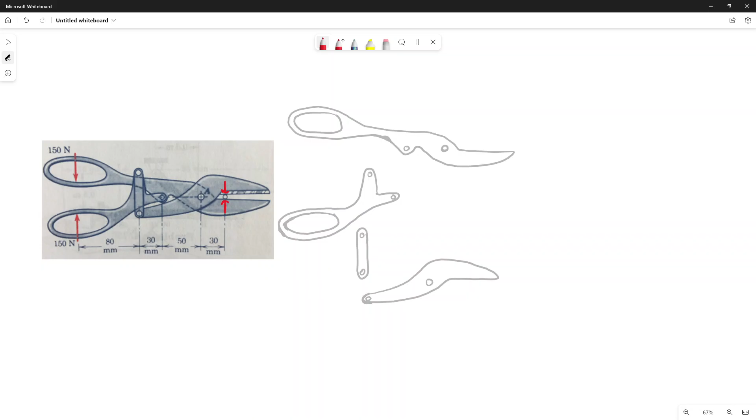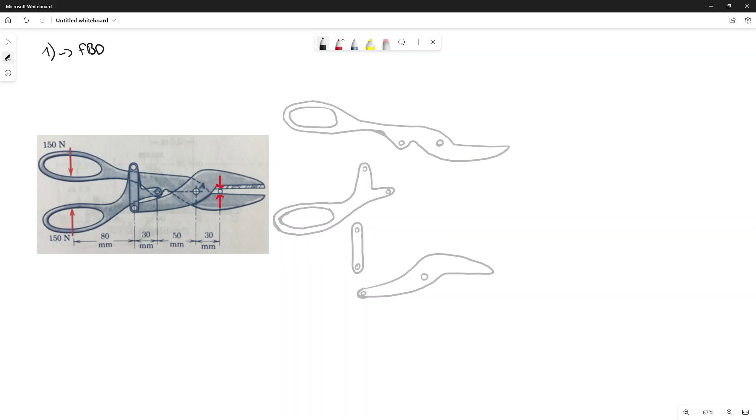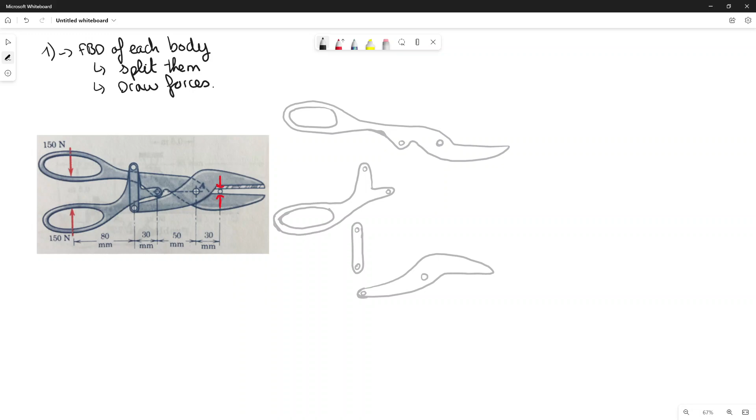Step number one, and I already did it to save some time on the video: free body diagram of each body. What you need to do is split them, and after we split them, we will now draw together the force on each element. So let's look at what we have.

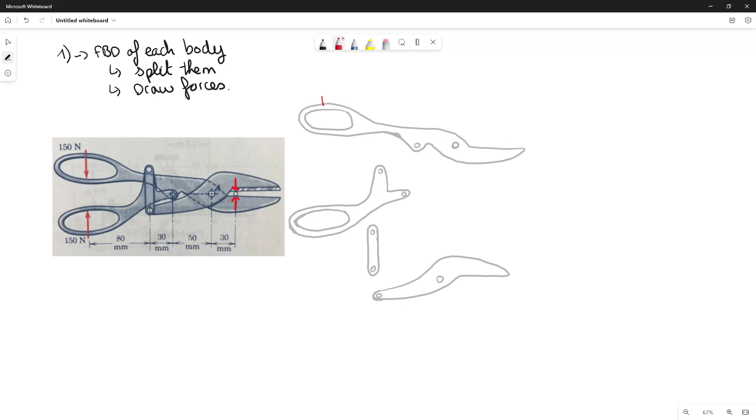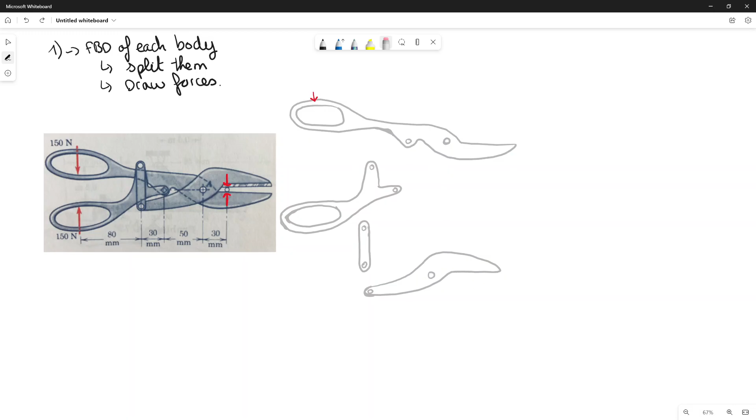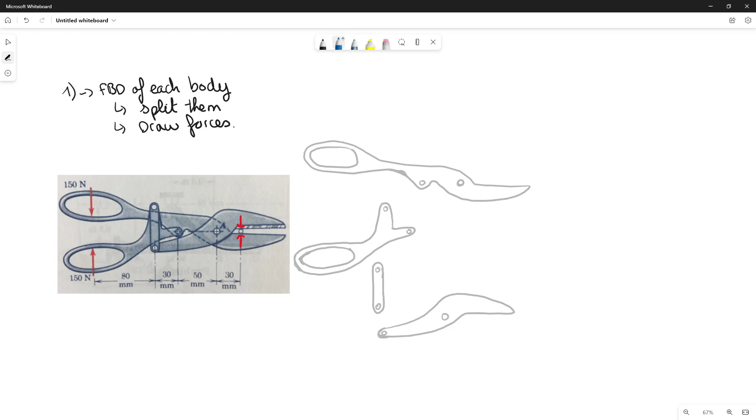We know that on each handle we have 150 Newton. We can draw that in blue, because we know it. I'll try to just remove the little arrow there. So we have one force there and one force there, drawn in blue because we know them, and we can even write the value 150 Newton and 150 Newton.

What we are looking for, and I need to draw the little wire, let's draw it there. What we try to find is those two forces there, so let's make an arrow, this one and this one. Let's call that F and F. They will be the same. That's the one that we try to find.

So now let's split the different forces, look at the different shapes, etc. If we have the force on the little wire, we have some forces back on that piece there and piece there. So this force on the top will go down, so this one will go up, and this one will go down. That's the same force we are looking for. Let's call that the force F and the force F, same as the wire.

Let me give some names to each point, drawn in green. We have the point A there on the middle, so this one is for this one, that's point A, and this one, that's point A too. That's the two forces there.

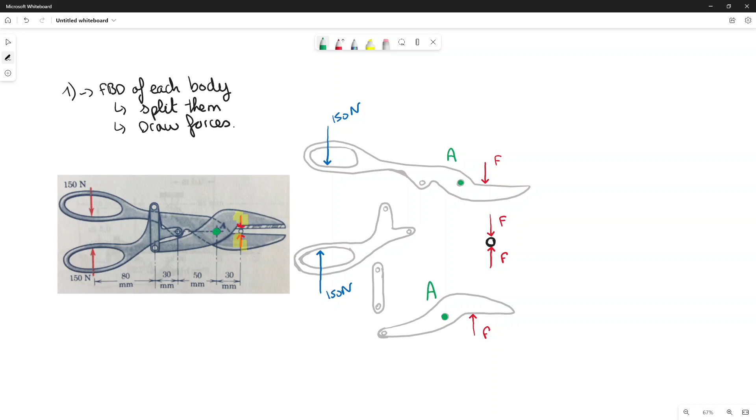We need some other names, so I will call that B, I will call that C, and I will call that D. Let's draw those points. We have B on the bottom handle and the top pin connection of this little link, and C is the bottom of the link between this one and the top scissor, so they are the same - that's what I try to align. And point D is this one, D and D. Okay, we have a lot of points.

What do we see there? There's something interesting we can see. In this link B, C, we have only two pin connections, so that means we have a two-force member. So we have some forces on this link.

Are they pushing? If you want to see that it's pushing, we need to look at this one - this yellow one - and if we do the moment about D, the 150 Newton will turn in that direction. So the force on B should be down. So we have a force at B down, so on this link it will go up. That's the same force, make sense? Because of the moment about D.

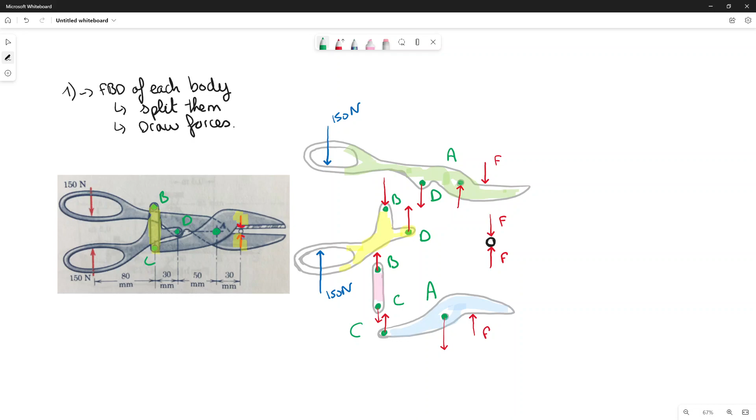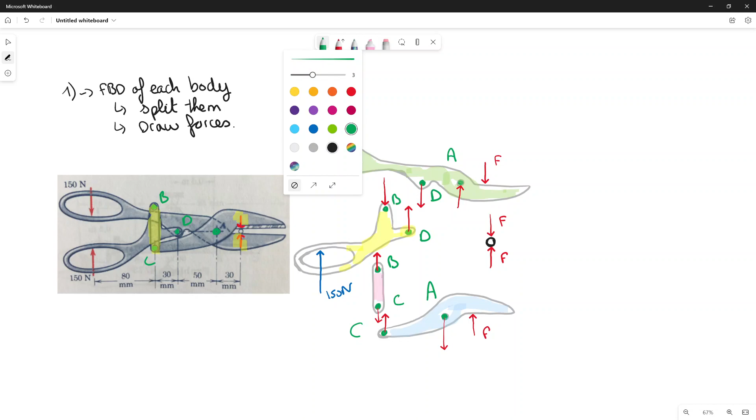Okay, we need some dimension, but maybe before I draw the dimensions, let's look at the strategy. What can we do? We know only two forces, the 150 Newton. So we have option 1, green one. I will begin to draw. So option 1, green, or option 2, we have the yellow. That's where we know some forces. So we have to begin somewhere where we know some forces.

If we look at the green, we have 1, 2, 3 unknown. If we look at the yellow, we have only 2 unknown. So yellow looks a good start, okay? We have 2 unknown.

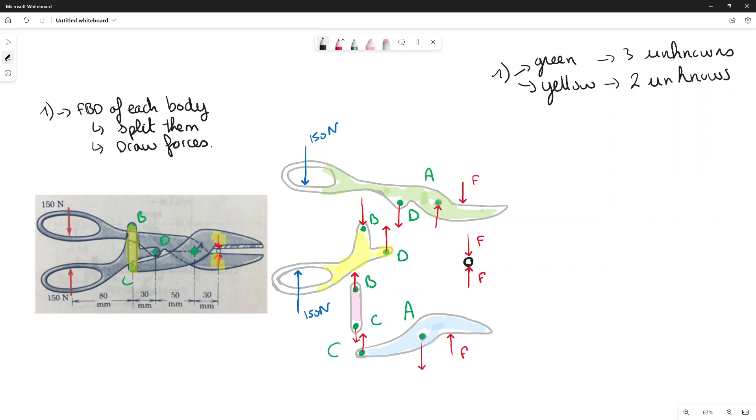And we can use an equation of moment with the 2 unknown at B or at D. If we do B or D, if we use an equation of moment, we will find the force at B or the force at D. So that sounds a good strategy.

Very good strategy. So let's say option 1, moment at B or moment at D. If we do the moment at B and we find D, we have D on the green one, but still 2 unknowns. If we find the force at B, we have B, we have C. If we have C, with the equation of moment about A, we can find F. So step 2 will be the blue one, where when we know C, we have 2 unknown left, and we can use an equation of moment about A.

Okay, so let's repeat. We decided to go with the moment about D, find the force B. After we have the force B, we have the force C. And when we have the force C, we do the moment about A and we find the force F.

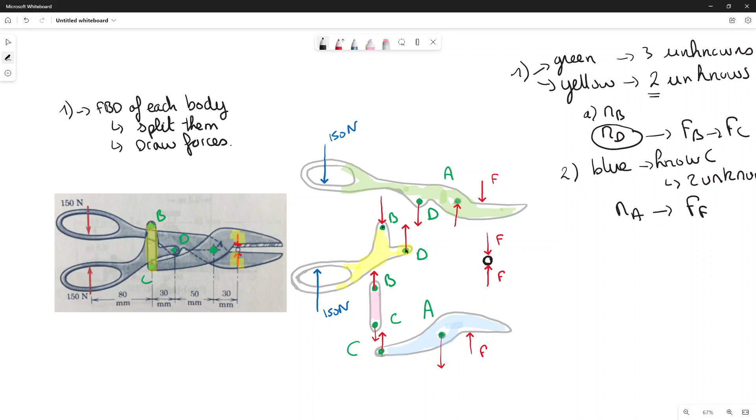So we need some dimension. When we do the moment about D, we need the dimension from D. So we need this dimension from B to D, that is 30. And we need this dimension, this one. Okay, ideally you put it outside the parts, but me, it's everything on it. So it's 80 plus 30, we have 110.

That's for the moment about D. And when we do the moment about A, what we need is the distance between C and A. So C and A, not D, C and A, that is 80. And between A and the wire, that is 30. I think we got everything.

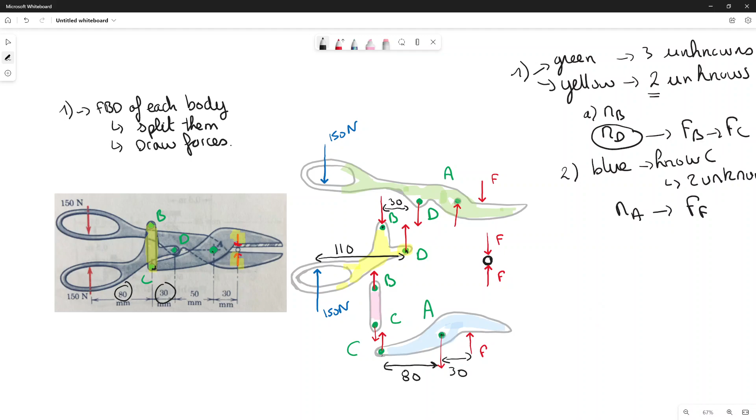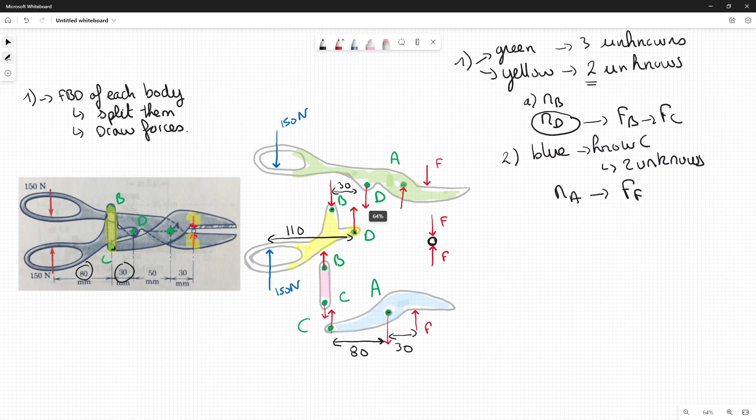So we think we will not even use the green body, the green element. So let's solve some. Let me try to use all my space for you. Here we go. Sum of the moment about D equals 0. So I am on the yellow.

Oops, I do the steps now. I am on the yellow body. Sum of the moment about D equals 0. Well, I have 150 times 110, and this is in the negative direction, like this, and I have plus in the positive direction FB times 30 equals 0. So I got FB equal 150 times 110 divided by 30. Let's make 50 times 110, so 5500 Newton. That's my FB.

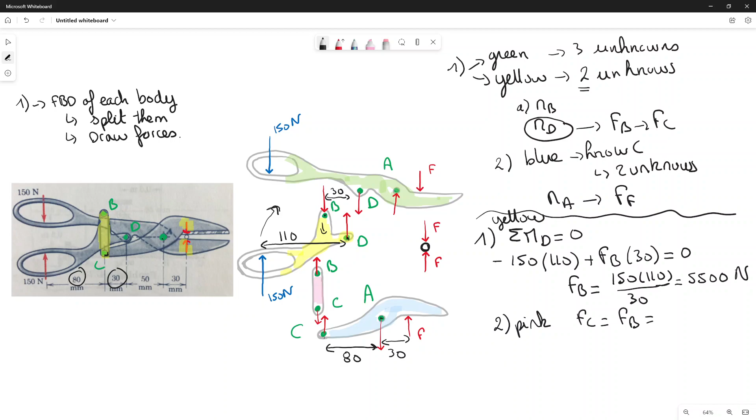FB equal 5,500 Newton, so FC equal, using the pink link, I can say that FC equal FB, so equal 5,500 Newton. That's a 5. Can you see that it's a 5? It's a 5.

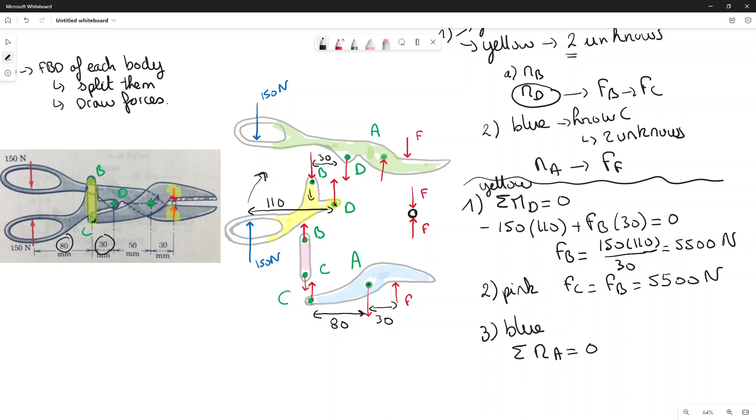And now third, I go at the blue body, and I do sum of the moment about A equals 0. We have the force Fc times 80 going negative, plus the force FF times 30 equals 0. Equation of moment about A. This one is in the plus direction.

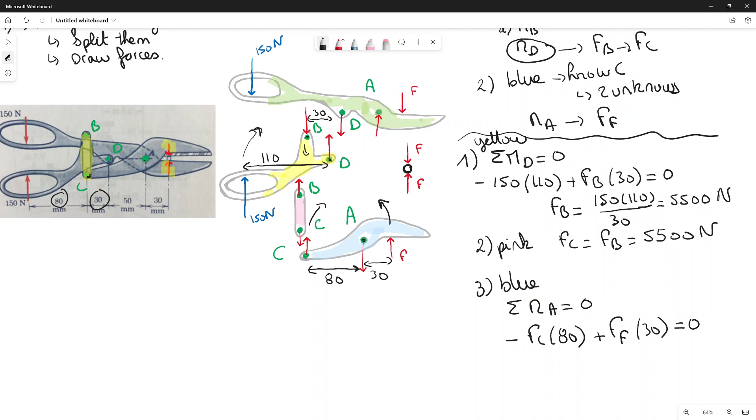And we got, so what we are looking for is FF. So FF equal the force Fc, that is 5,500, times 80, the distance, divided by 30. How much is that? Let me calculate. Oops, so it's equal to 14... Yes, 14,667 Newton.

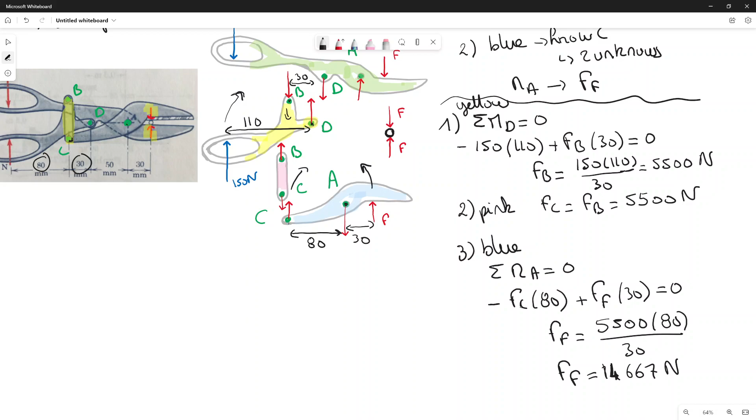So conclusion, we apply 150 Newton, and on the wire we get 14,667 Newton. That's about 100 times the force that you apply, that will be applied on the wire. And you see why it is much more efficient to put the wire next to A than on the bottom, like there. Much more efficient to be closer to A.

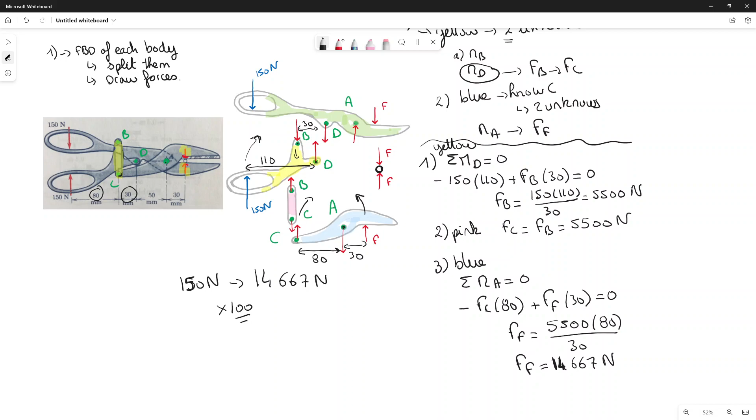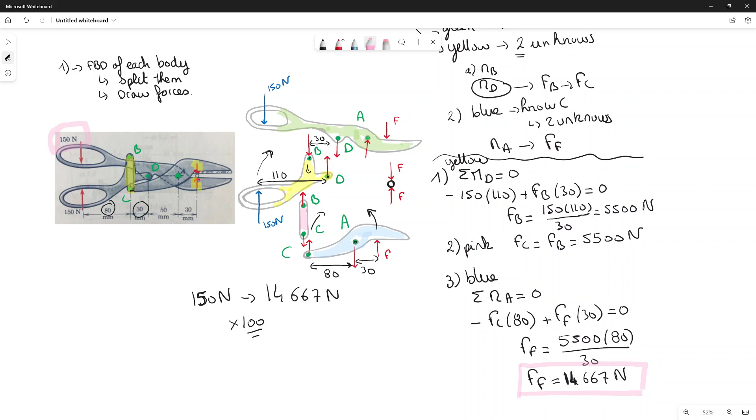So that's pretty cool, Scissor, right? Great to cut anything. So I'll let you redo this with your different data. Let me know if you have any questions. And final answer, this one, in our case, when we have 150 Newton at the beginning. See you later. Bye-bye.